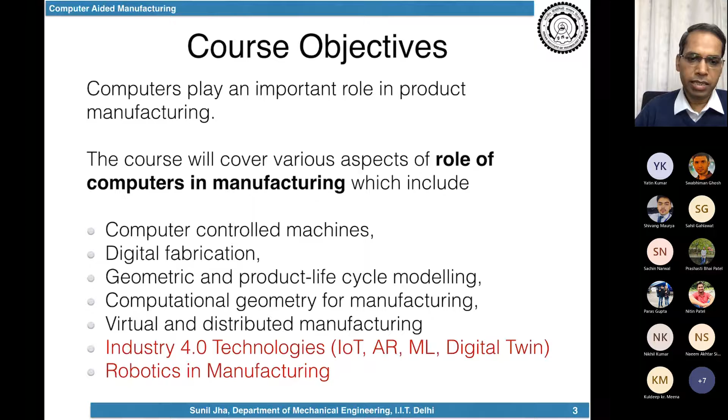So it will not just be limited to what is available in the books, but I will try to give you a wider perspective in terms of the latest developments happening around industry. This is the course objectives that we took, and the course content detail is mentioned around these topics only, but topics 7, 8, 9, 10, 11 have been added, and I will be covering them in this course.

And certainly I have distributed that over the 42 hours of lecture. In fact, I have prepared a detailed lecture by lecture course plan also. So I will be covering at least the basics and introduction of computer-aided manufacturing, then we'll talk about computer-controlled machines and how you will be programming these computer-controlled machines.

So when it comes to programming a CNC machine, it's not just a part program that most of you understand. We will also be talking about the controller, or the logic controller that is working, or the motion controller, how it will be controlling the machines. So when you write a particular instruction of the code, how that code is being executed by the computer.

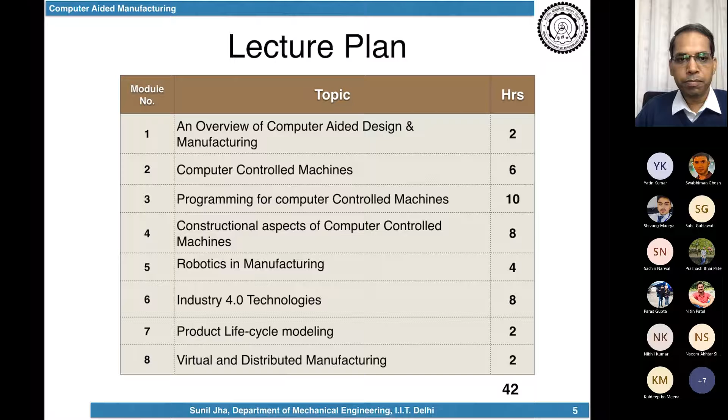So we'll understand all those aspects. We'll also be talking about robotics, what kind of simulation environment is available, and how you can design a robotic manufacturing cell. We'll talk about Industry 4.0 technologies and product life cycle. So that's how I will try to cover most of this content in the 42-hour lectures.

I will also try to give you a glance of all these technologies, at least some hands-on learning, whatever we will be discussing in class, so that you will also be able to perform all these experiments on your own.

So when we talk about programming CNC machines, since you are not coming physically to the lab, we'll take help of some simulation software so that you'll get an idea about that. You'll use a CAM software, MasterCAM, that is available, so that you will be able to try out your program and run it for the CNC machines.

I will also be covering PLC programming, that is the logical control, so you'll understand what exactly happens inside the controller. As an operator, it's fine that you understand you have to download a part program, run the command, and the machine will start preparing a component for you. But as an engineer, we need to understand how the instructions of the code are executed inside the machine and how the relative motion between the workpiece and the tool happens to generate a particular shape. So we'll try to understand all those aspects in this course.

As I was mentioning, I will also give you hands-on experience with some environments or software helpful in implementing Industry 4.0. We'll conduct some labs on commercial platforms available for implementing IIoT, and AR if possible—let's see how quickly you will be able to create augmented reality applications for manufacturing. We'll also give you a quick idea about the environment available for implementing machine learning for manufacturing and robotics. And I look forward to you putting all this learning together in the form of a term project. That is the idea for 28 hours of the lab plan.

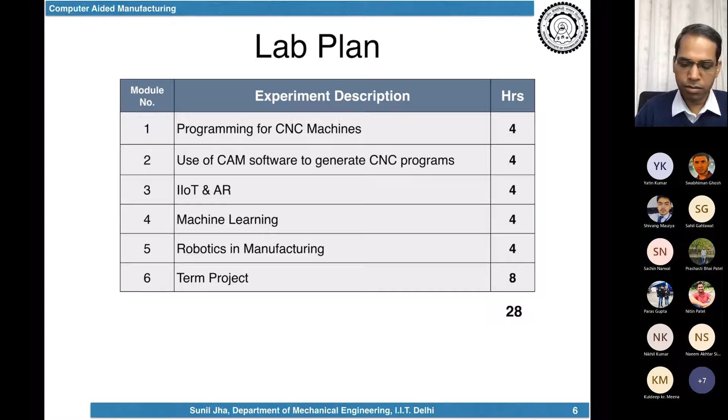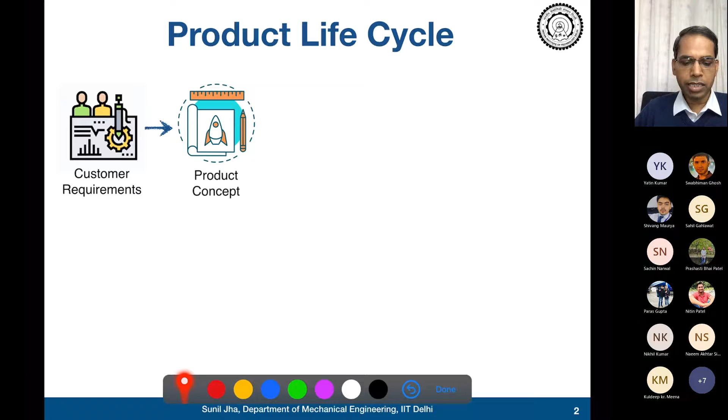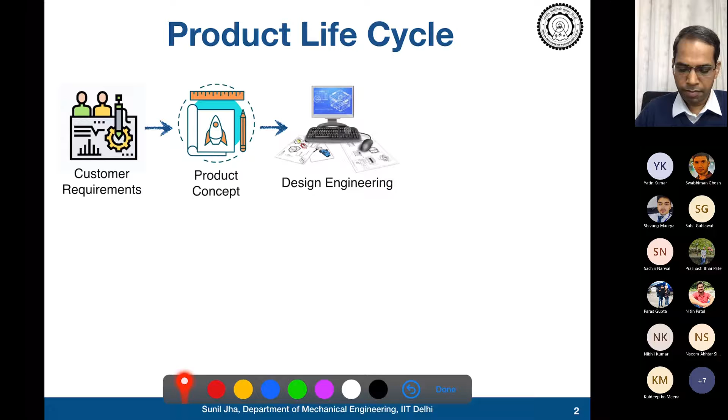So after the product concept is finalized and discussed, you will go into design engineering. So what is the difference between product concept building and design engineering? Can anyone tell me? When I say product concept and when I say design engineering, what is the difference? Product concept is basically the idea from which we are going to make a product, but design engineering is basically the on-paper dimensions or the models of the idea.

Correct. So finally, when we look forward to the design, we will do the analysis of the design and finalize the dimensions of the product. Based on the dimensions, you will analyze and finalize the material, and what kind of tolerances are required. All these specifications are finalized as part of design engineering, right? So after the design engineering, you will get the final manufacturing drawings. That is the important part here.

So that you will release the drawings and your manufacturing activity starts after this. Once a drawing is available in the factory, the manufacturing people will start working on those drawings.

So after the design, people release the manufacturing drawings. What is the first activity you will do? Shall I take the drawing and immediately go to the machine, pick up the raw material, and start the manufacturing? Some of you might have seen the production activity in factories, maybe visited as part of your previous degree programs, or worked somewhere. So what will you do with the manufacturing drawing? How shall I start the manufacturing process?

Anyone? The material, the basic material which is required, from which we are going to manufacture. Correct, selection of material - no, selection of material has already been done in the design engineering. So you are not selecting now, because once you get a manufacturing drawing, material is already specified on the drawing itself. Only thing you will be doing is procuring that material. Is that right? Oh yes sir.

And then you procure raw material. What else? Let's discuss, let everyone participate. Otherwise I will just read out the name and then ask, and you can respond. That will also be fine if you're not coming voluntarily.

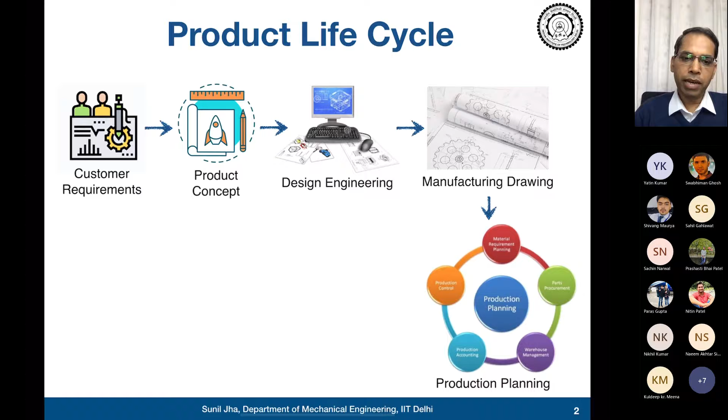Then actual manufacturing activity will start. So you will be utilizing the machines, and then you will be performing the operations, and the part is being produced. So individual components are being produced. Later on, the assembly will happen, and then finally you will be making the part that has been designed.

Now you can't leave production just to perform the activity, and later on realize whether the part is as per the design requirement or not. So what you will be doing is continuously checking the quality of the component. So while the production is going on, you will also be doing quality control, so that on each machine or during each process, the quality has to be controlled.

That is how the part drawings will be there. Apart from the assembly drawing, you will also have a part drawing specified with the required tolerances and surface finish, so that whenever you are going to assemble the final product, there will not be any issue. That's how quality control is a very important part over here.

It plays its role continuously during the production activity, and finally once your product is manufactured with the right quality as per the design specification, then it will be delivered to the customer and dispatched. So that is how the product life cycle works.

And in the days when computers were not there, when controllers were not there, when the machines were conventional machines, we need to visualize how we used to do these operations or activities. Certainly all of you - I'm not sure whether you have gone through the preparation of drawings in your engineering courses - we always used to do a drafter and the sheet, and then we'll draw those drawings ourselves.

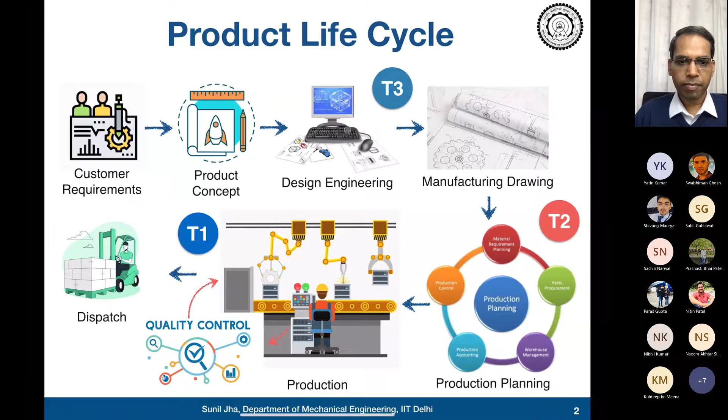Now, when we talk about the role of computers, let's try to see that. Same block diagram, I just put it differently. Let's revise how we will do the activities with the computers. So now everyone has to tell me where exactly you are using them, because we are not studying this thing for the first time - you already heard about some of these technologies earlier also. So where exactly will I be using computers, and which activity is being done on computers now?

So let me ask Kumar Vishis.

So in this product life cycle, where do you see the role for computers today, that people are already using? Drafting - yes, drafting certainly. So drafting, and before drafting, what will you do? Designing - designing, correct. Earlier, I'm not sure whether you have seen that duration or time, people were drawing everything on AutoCAD. So that was the drafting tool.

These days, we are not doing drafting as such because our CAD models are sufficient. Once you perform the design engineering, the surface models or solid models are being prepared, and the drafting can be done easily out of that. So you are not doing the complete sketching of the product.

It will be coming out from the CAD 3D design itself or the 3D model itself. We'll see a lot of CAD softwares as well as hardware available to perform the first three activities: product concept, engineering design, and drafting. There are common softwares for performing these activities, whether you take an example of SolidWorks, Creo, or NX.

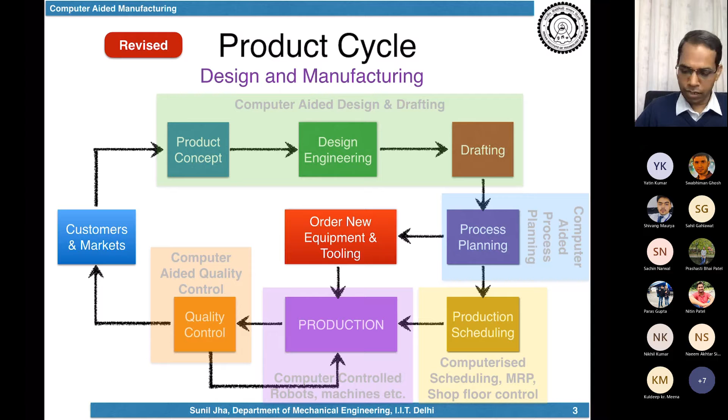So when we talk about the use of computers in the whole product life cycle, we will be looking for a much broader implementation than just what was defined in books written 10-15 years back. Because these days these technologies are changing so fast, we have to understand the pace of implementation, and that is how you will keep yourself familiar with these new developments.

So when we talk about automation and smart manufacturing, and certainly the use of computers, our idea is that we should reduce the various time elements in the product life cycle. I was explaining the 3 time elements, T1, T2, and T3, that you have seen in the previous slide. I will discuss those times, and then we'll understand which is important in automation and which is important in smart manufacturing, and where computer aided manufacturing will help in reducing that particular time component.

When we talk about automation, let's try to understand, because automation, CAM, and computer aided manufacturing are all related. We need to understand what exactly will be reduced with which type of technology. When we talk about automation technologies, we mean technologies that are directly integrated into the machines, which transform the raw material into a product. So where the actual production is happening, there we will be integrating the automation technologies.

So if you see the 3 time components we discussed, T1 is the actual time spent on the product while the manufacturing happens. There we will focus more on implementation of automation technologies, how we can combine multiple operations, how multiple tool changers can take care of that, so the different machining requirements can be integrated into the automation itself. That is the way we need to see the role of automation technologies, mainly to reduce T1.

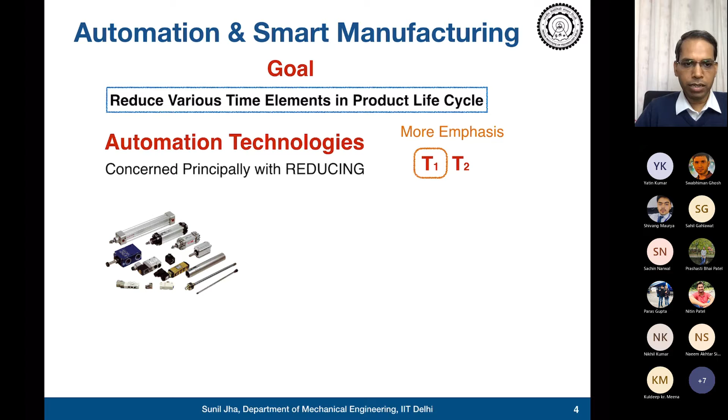So automation technologies are helping you in reducing T1. Our emphasis is always on technologies that help us reduce the time spent. So that's how we use most of these pneumatics, hydraulics, electropneumatics, and programmable logic controllers, the PLCs, are basically utilized.

These are all automation technologies that help us in reducing the time component T1. And when we talk about smart manufacturing, because that's more relevant today, it's not just mass production. Today we are talking about customized manufacturing, batch size of one, or just one component of its own type. Then it is very important how much time you are spending on designing that component, how much time you spend customizing the design, or how much time you spend procuring the material, or in preparation for manufacturing.

So T2 and T3: T1 is actually spent on the machine, T2 is used for preparation for that production activity, and T3 is the one-time design activity that you have done. Many times it happens that when we go for mass production, we'll spend 3 months, for example, designing a product, and later on we'll just plan for each batch. We'll spend a few hours planning for the batch, and later produce a batch of 1,000 or 500 numbers, maybe planning for a shift, and the production will happen.

Now, when we talk about smart manufacturing and customized manufacturing, you will be talking about preparing a very small batch, maybe 1, 2, or maybe 5 numbers. In that case, it's very difficult to afford 3 months of design time, or even a few hours of batch preparation. So that is how smart manufacturing is very critical about T2 and T3. You will be more concerned about how you can reduce the 3 months time, so that a unique product can be customized and designed in a much faster way.

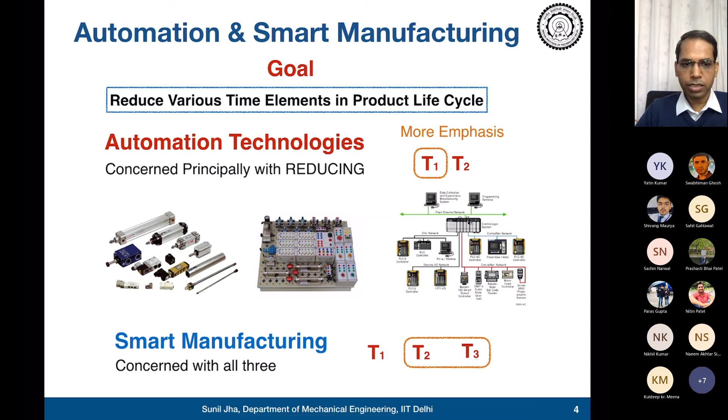So these technologies, when we talk about Industry 4.0 or smart manufacturing, we are more concerned about the technologies for T2 and T3, because T1 is already being taken care of through development on the automation side. So once we understand these time components, we will understand what type of technologies, and what role the technologies will play in the production activity.

Can I see the hands? If you can raise your hands, I'll see whether you have heard about Industry 4.0 earlier, or are just hearing it for the first time in class, it's also fine. I can see only Aman has raised, yeah, Yatin, Naeem, Mohit. Good, Shivang. Anyone else heard about Industry 4.0 before we discuss it in the next class? So only 4 people I can see. Yeah, Nitin also raised the hand. So I still find that only about 1/3 of people are familiar with the terminology of Industry 4.0.

So it's very important to understand the context of Industry 4.0. We'll spend some time understanding that, because it's very apt and relevant today to understand, when we talk about CAM, what exactly is the change happening in manufacturing. We'll discuss that part in the next class.